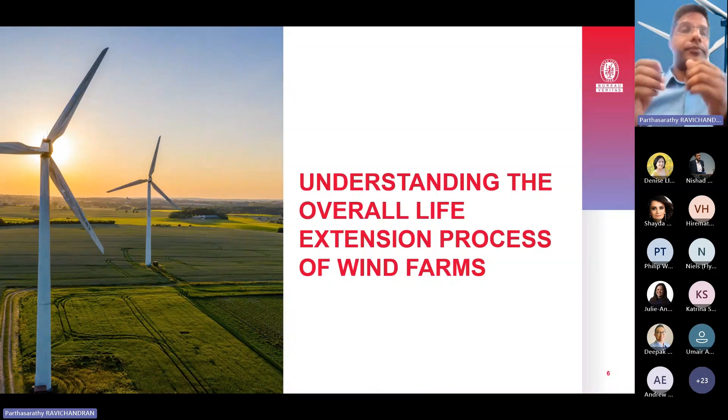What we have learned in the European sector as well as in the North American sector is that, from the reports compiled by Global Wind Energy Council and Wind Europe, they mentioned that the wind farms which have been commissioned in the early 2000s and up to 2010 started coming into a phase of repowering as well as lifetime extension, and some of them are also getting into a decommissioning phase. So the aggressiveness of this lifetime extension is not only happening here in Australia, but has been in particular looked at in Europe, where governments are supporting owners in realizing that their existing wind farms could be better off repowering rather than decommissioning.

So there is a both contexts will be discussed.

If you look at the complete scenario, there are about 40.9 gigawatts of onshore wind farms that has been installed. Typically all these 40 gigawatts of wind farms have got 2 megawatt and 1 megawatt typical nameplate rated capacity of wind turbines. At the most, Germany, followed by other European countries, are in the lead up to look at repowering or life extension situations.

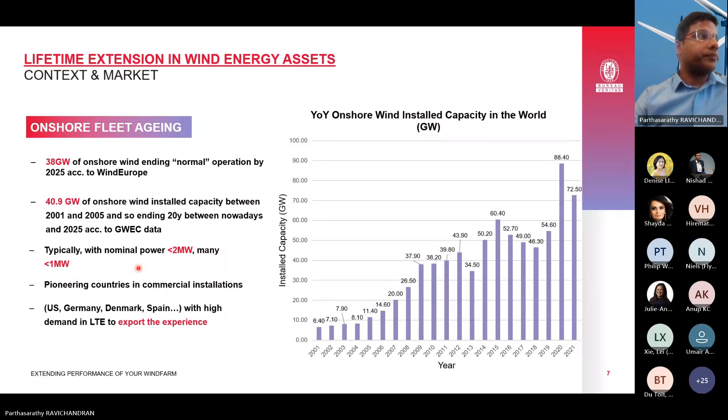Now, when you look at what's happening in the Australian context, we see that in the next 10 years' time, or even 8 years' time from now, we have different categories of wind farms coming for end of life, considering they are 20-year design life. So when the commission year was set between 2002 and 2010, we could see the list of wind farm owners whose wind farms will be coming for LTE scope.

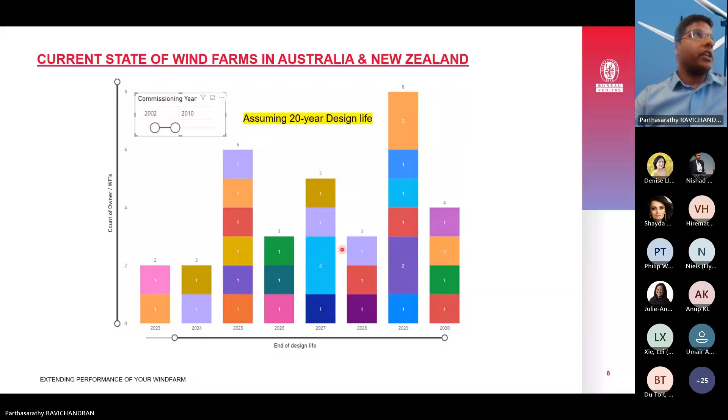Now, as I mentioned, the life extension point is whether we want to do a repowering, or whether we want to extend the life of the turbine, or whether we want to decommission. But we have to look at what is the context of going for a life extension process.

Some of the owners are realizing that they want to have decarbonization targets. There is also an issue with respect to waste recycling after decommissioning. How are we going to handle that? What are we going to do with the blades which go to a landfill? Is there a process to retrieve and reuse them in a circular economy?

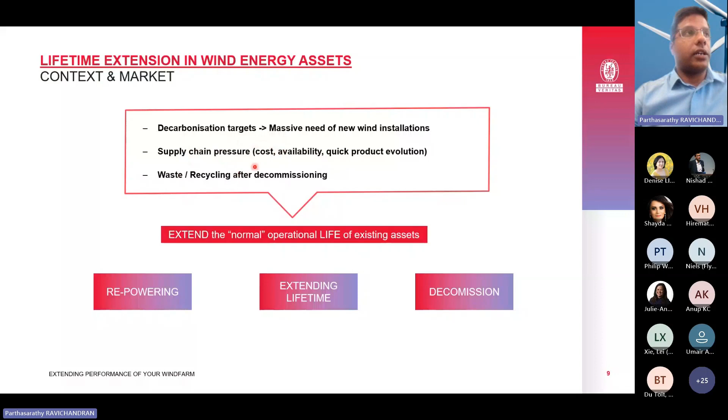And also the recent pressure on the supply chain due to cost, availability, and product evolution in a short span of time. It's much like you have a hybrid car and an electric car, and there's a rampant push for the use of electric cars, but the market is not well prepared in that context. So similar kind of issues also exist with turbine technologies growth.

Now, LTE doesn't have a proper IEC guideline, but it is in the draft stage that has been proposed, and it's possible it would be released this year.

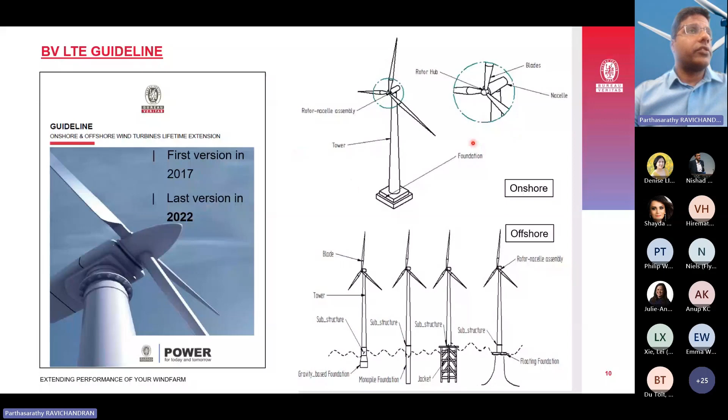Bureau Veritas has its own LTE guideline that has been vetted by leading technical centers. We released our first Bureau guideline in 2017, and the latest version was released in 2022. What we covered in this guideline is not only onshore turbines, but also offshore turbines.

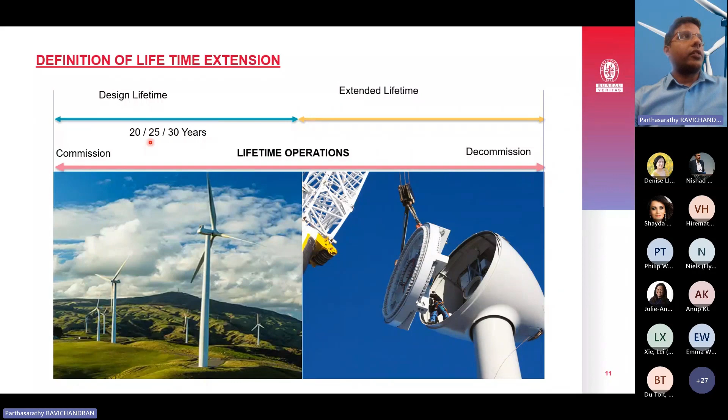Now, when you look at the concept of life extension, what it means is that there is a design lifetime when the turbine is actually produced before the commissioning stage, and it has an option for 20 to 25 years for typical onshore turbines, whereas for offshore it would be between 30 to 35 years in the design lifetime space when the turbines are designed.

In the context of what extension means, when it is reaching 20, 25, or 30 years, how much can you extend when it is reaching its end of design life, and how much can you still use the existing structure to keep producing power. The question then comes to whether you want to go for repowering, decommission, or extension of life with what you have so far from your wind turbine production.

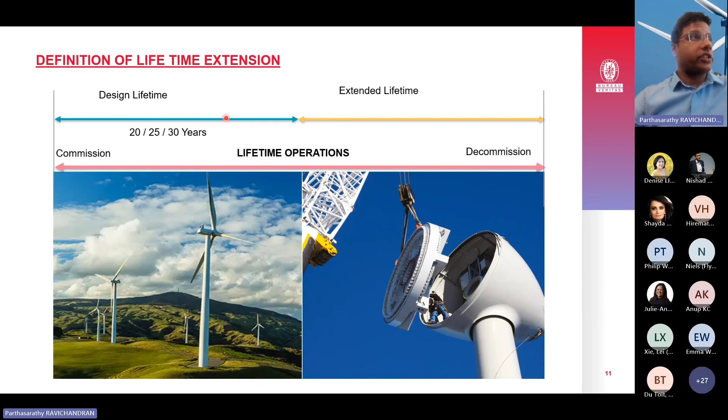In this first slide of the lifetime extension, I would be walking through the repowering of wind farms. Why do we need to consider repowering? How do these strategies help the owner decide at a very early stage when they want to repower it? What are all the considerations and strategies you need to look for?

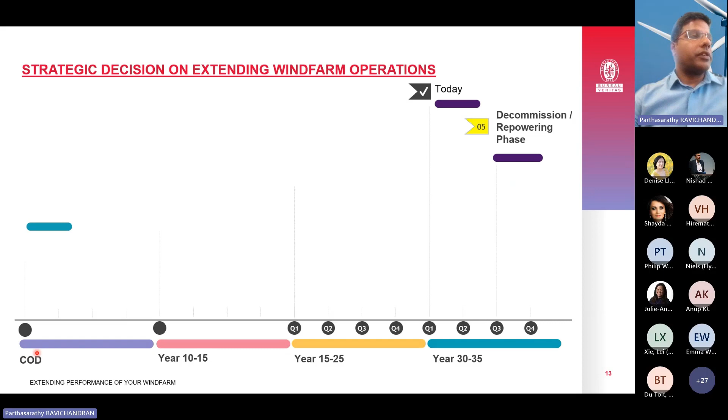So when you look at the complete life cycle of the wind farm or wind turbine, from commissioning date all the way up to year 30 or 35, we would see in terms of repowering whether the owners could make a decision on how much is the capacity at the time of commissioning, and how much more is also available for the future. For example, if you pick and choose a particular wind farm at a particular site, and in the future there is no augmentation of grid capacity, then there could be a high chance that you may not be able to extend the life, or you may have to go for a decommissioning process.

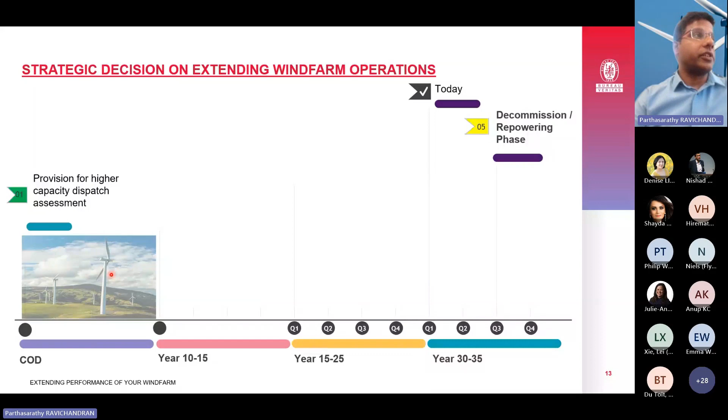On the other hand, if there are feasibilities that the site has got higher dispatch capacities, there is a chance that you could look for an LTE assessment, and then in year 10 or year 15, you could possibly evaluate whether you can go for a repowering scenario.

In the next couple of slides, I would talk in detail how repowering concepts are looked at and how it has been evaluated in Germany for a specific case, and there are some tests and trials that have been made for repowering cases.

The other aspect is once you've reached the later stage of the design life of the turbine, in year 15 to year 25, this is where the actual assessment of LTE starts. So you may have crossed your break-even period from repowering to using the existing turbine to extend its life and decommission it. But in some case-by-case scenarios, repowering could also be done at this stage, so you're ahead of time, say 10 years or 5 years, and use the existing wind farm facility for a repowering case.

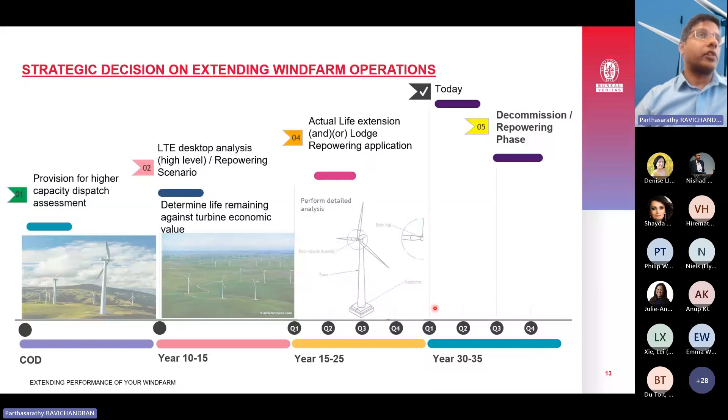The reason it's a golden site is because at that time you had a best in class for those sites, but the turbine technologies were not up to speed.

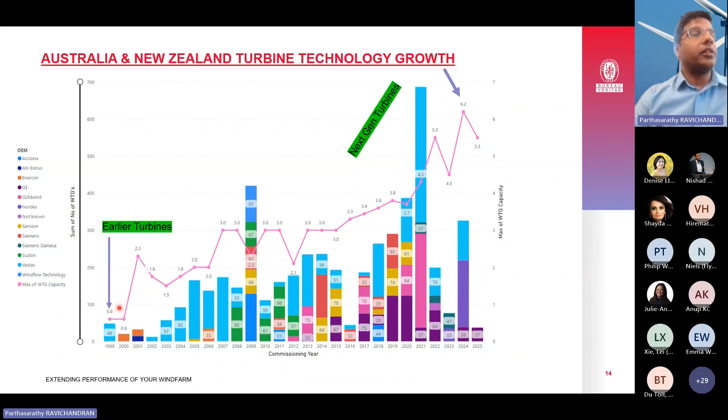But then there is again feasibility going on about which areas those turbines would be suited for. You may run out of space for those turbines, not able to fit them for these kind of wind sites.

On the other hand, if they would reevaluate the same site, they could go maybe from a 2 megawatt to repurpose the site for a 4 or 6 megawatt class turbines.

But these steps need to be taken a bit early on, where you could validate what is your cost layout in terms of how much you are expending your OPEX cost. Is your turbine consuming more cost to produce per location? And how is the access to your existing supply chains as against your new turbines, which would be much more efficient than your old turbines.

So we have looked at the Australian context. We have seen that there's been no repowering so far carried out in Australia. The reason is that regulatory support could be one of the reasons. The other reason is that the connection capacity in older sites is not permitting that dispatch, or the grid facility is not sufficient enough to push to the limits.

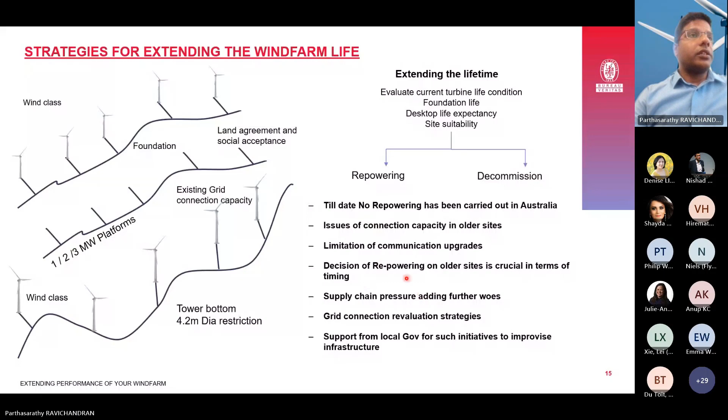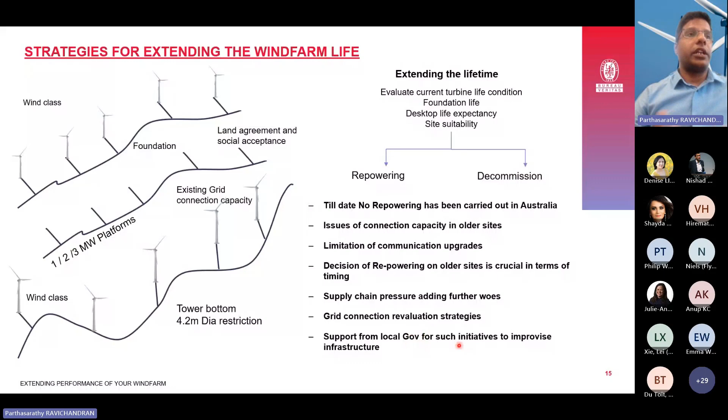Third point is looking at your communication systems - how your underground communication cables have been laid up, have they been up to date from 3G, 4G, and upgraded to 5G, those kind of issues. Then the other issues are your local government support, to accept whether the new turbines could be accepted in the same location. So there are two aspects to look at - one is financial perspective and also social acceptance.

Yeah, so Partha, sorry to interrupt - just very quickly, you mentioned one of the critical aspects here is around planning and timing. When do you think is the best time to start thinking about some of these strategies?

So repowering concepts could be even looked at as early as when you're signing up your contract with your OEMs, even before the wind farms are set up.

So early stage developers could think about how best to utilize the always-on wind power production capacity of a wind site location. For some, based on each owner's decision process, case by case, it would be advisable to gain information at an early stage, relook at it at year 5, and then possibly proceed to commence repowering if it all turns good in year 10 to 15. That way the timing would be much better. You could have a staged approach where you have ongoing capex and opex, and then a new influx of capex and opex as well. So these are the ways you can look at it.

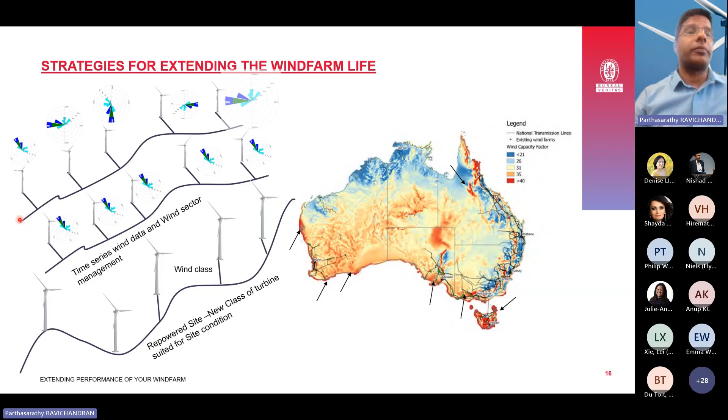It may seem very straightforward in terms of talk, but in terms of assessment there are more things to look at. What we need to look at is whether you need new turbines, shadow flicker assessment, aviation assessment, permitting process, transport and logistics, and how far the new turbines are able to cope getting from your existing shipyard all the way to the same location.

You're doing both things at the same time: one is decommissioning your existing turbine, and also, in a matter of time, you are preparing your land for the new turbines.

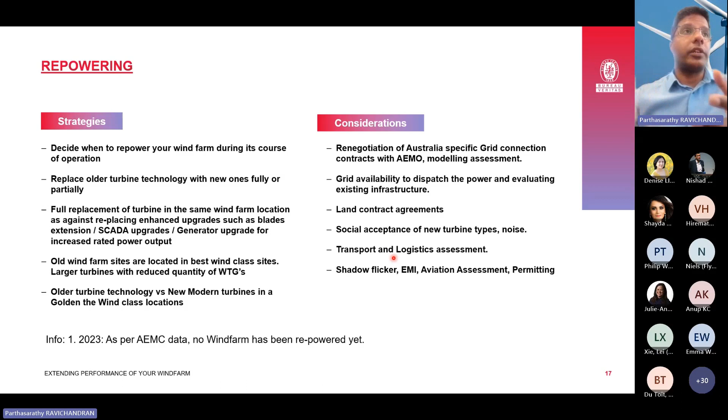Some companies or owners in Europe are also trying to see if they can reuse an existing foundation itself. For example, let's say you have a 4 megawatt class turbine and the foundation size is 6 to 10 meters in diameter. Can the same foundation be used or repurposed for a 4.5 or 5.5 class turbine?

Now I would like to jump into the context of life extension, what exactly the life extension process would look like. I'll walk through the process and what information criticality you need to gain from your OEMs. If your wind farm is 20 or 25 years old and you don't have a lot of information, it creates a lot more uncertainty, and more inspection activities have to be carried out on the turbines.

Then I would walk through how the turbine design life of 20 or 25 years is arrived at, and based on that, how you are extending the turbine life. That's the core key aspect of this webinar. And then how do you interpret P50, P90 results? How do you look at fatigue damage loads? What happens when there are cracks, visible surface cracks on major components such as the mainframe, bed frame, or even the hub cast? And then at the end of the process, you have condition assessment strategies and maintenance strategies prior to the decommission phase.

So basically, life extension is about looking at a component where it is doing the load transfer from the rotor loads onto the major components. So the major components like main shaft, gearbox, and generator are replaceable, but then there are non-replaceable components like your hub cast, mainframes, and the generator subframes, and also the tower. So we would be evaluating those cases.

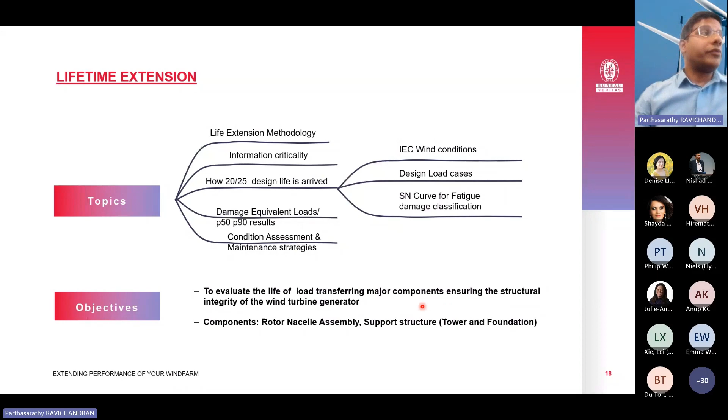Now, Bureau Veritas has its own guideline with a 3-stage process. Based on the level of information we have from owners, we categorize what context you're looking at, whether from a preliminary study point of view, whether you want to go for repowering, life extension, or decommissioning phase. Based on that initial information processing, we have an option at stage 2 to do the analytical process overall, followed by a condition assessment, and then give you a final evaluation, which is a confirmation certificate saying these turbines could be extended from their end of design life of 20 or 25 years to maybe 6 or 8 more years in operation.

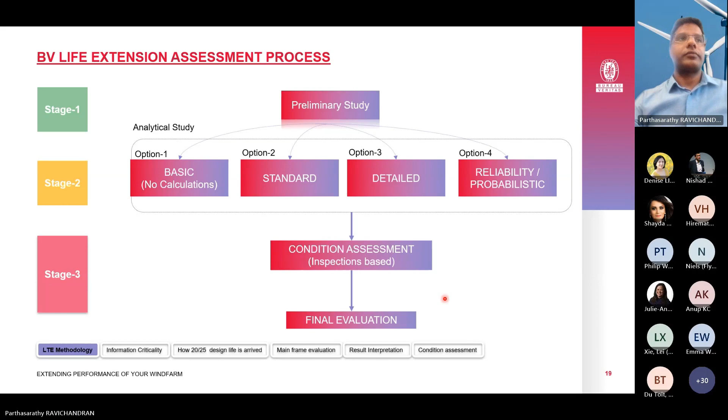As I mentioned in my previous slide, the differences of preliminary, analytical, and condition assessment, what exactly the scope would look like is what are the contexts, information we are capturing, what is the regulatory context, what are the current environmental conditions the turbines or wind farms are placed into. Then into the analytical phase, we would be trying to use the information to compare the site wind load conditions to the original design the turbine was intended for.

We use an aeroelastic model, which would have been created in the initial phase of the turbine design itself, but it's not easy to get that kind of information from your OEM. So it becomes a gap analysis to rebuild this same aeroelastic model and then come to a conclusion about what's the life left.

The other aspect is looking at the turbine criticality and also the fatigue life, which determines how much life is left structurally on your turbines to perform.

Then comes the case of condition assessment, where based on the analytical study, we would come to a conclusion on how many turbines have to actually be visually inspected or even have to go for advanced NDT methods of testing. And then it would also look at your foundation assessment, whether you need to do an NDT assessment without digging out your foundation to see exactly what's happening. We have new methods to evaluate the foundation.

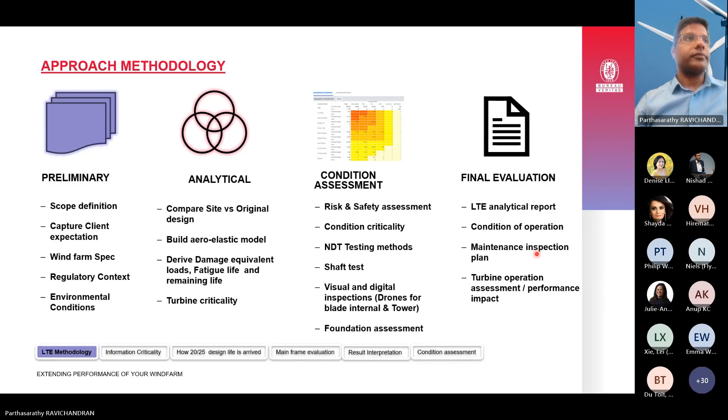Now, looking at the overall methodology or overview, as I mentioned, we gather documentations, and I would list in the next couple of slides what kind of documentations or criticality information we look at. Then what kind of data we prepare for the aeroelastic model, and then make a judgment of remaining useful life. This could also be not only fatigue load assessment, it will be also in the context of a reliability assessment.

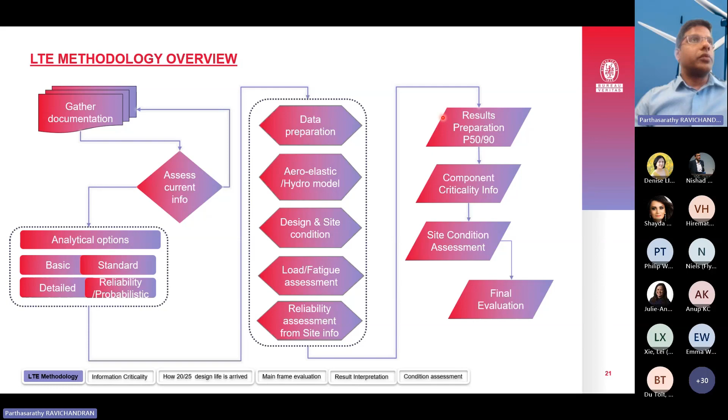Some owners may have this data saying, okay, I have an OEM's forecast of OPEX failure data. Could we be able to give a forecast of how much time this reliability assessment could be performed from your existing design life to the life of failure? From that, we would be able to prepare P50, P90 results, and then come to a conclusion of component criticality.

Now, as I mentioned in the previous slide, if the amount of information from the owners is less, then we may go with a basic approach. But then in the context of inspection, or the efforts for us to come to a conclusion about how many life years are expected, we may not be able to give you confirmed logical reasoning about whether it can sustain beyond 2 years, 3 years, or 6 years. Basic approach would limit us in those kinds of efforts.

But when we have more information from a reliability or probabilistic based approach, or even standard approach - there's a difference between standard and detailed approach. In the standard approach, we would have more information gathered from the owners, which would be sufficient enough to gain knowledge of what's the actual model the turbine has been built on, and how realistic our results are getting close to the original design.

In comparison, the detailed approach would have even more information, like control system strategies that have been performed on the turbine, and all the changes that have been done which are affecting the turbine loads. So the more the information, the less effort is required for us to predict the results.

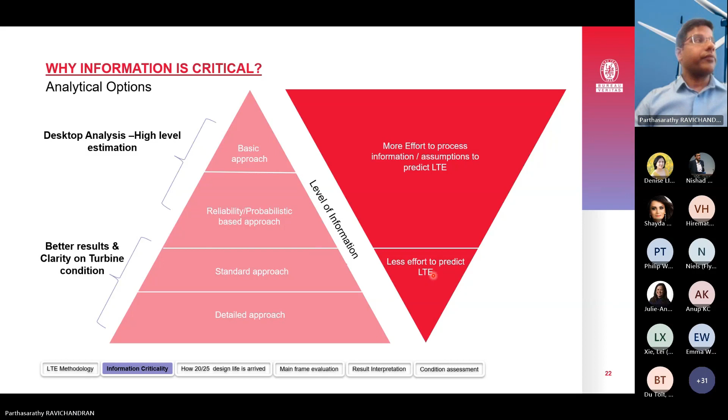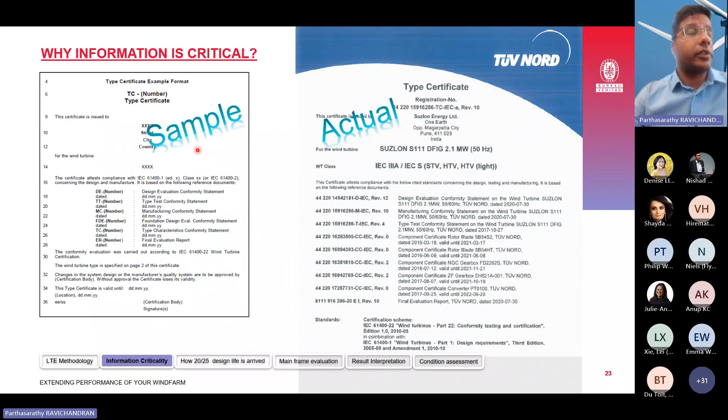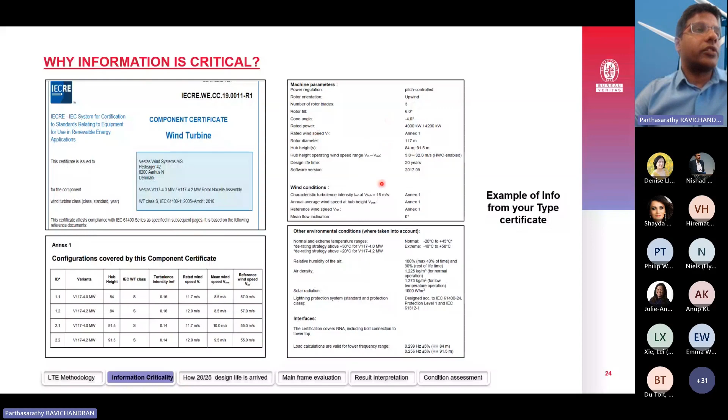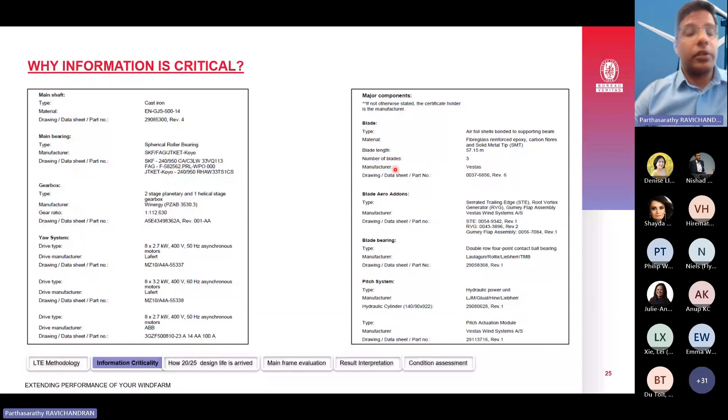Now looking at this point, there are more variants here, and what is the type of information in terms of the model that has been used is what this tells about. If you go one step further, we have more information in terms of where the supplier, which component has been supplied from where. Has it been manufactured in-house or from an external party who are type certified, component certified as per the requirement? This is like a certification body requirement.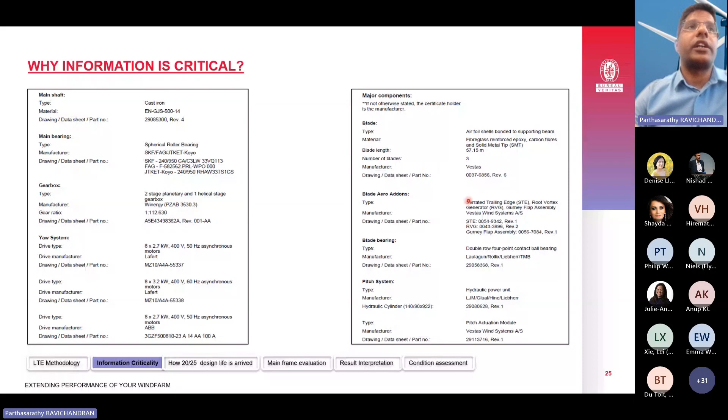So this information gives us a complete scenario. Has there been design defect issues or not? Then we would be able to tell, from your current design life, where it is going to.

Now, the other aspect of looking at site and design is the assumptions we make in the design simulation process, like air density or other parameters, which would be as per the guidelines of the 61400-1 IEC standard. But when we look at or evaluate the ground reality, it could be a bit different. So we need to bridge this gap and build the uncertainties in, and come to a conclusion on what's the actual structural behavior of the whole turbine.

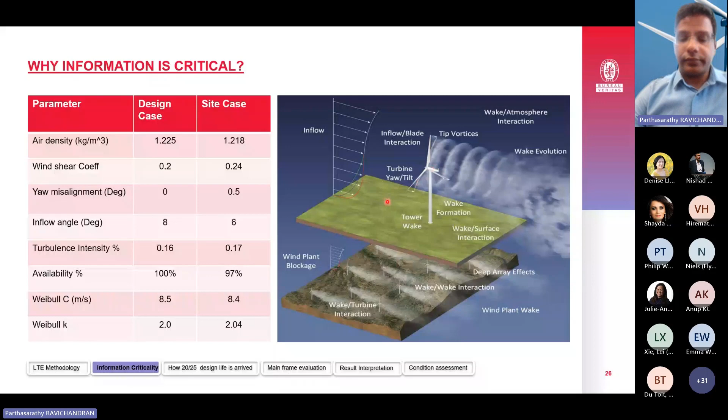Now, this is the core part. How do you validate your structure? I'm trying to give you context with this example.

The picture on the left is a person running a marathon once a month, and all his limbs are normal. But on the picture on the right, we have a person whose limbs have been replaced with prosthetics, and he's utilizing a structure trying to run the same marathon.

So what would be the difference? If we want to remodel this kind of situation, we have obstacles in between, like desert conditions, icy or elevated conditions, flat terrain conditions, or they could be doing a lot of high jumps on their way. These are the obstacles they could be seeing. So in terms of the loads which they would see on their knees, it will be different to what this person would see on his prosthetics.

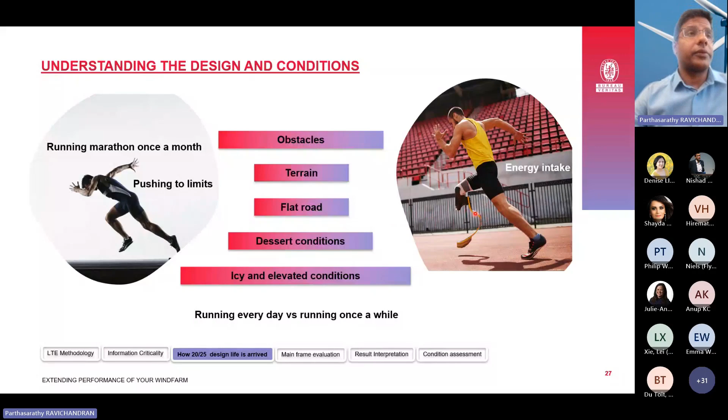Now, looking at another context of validating a structure: in the olden days, cars were not as safe as what we would see today. If you look at the example of Formula One, their purpose was to make sure that they are 10 years ahead in terms of validating how structures are safe enough for people in different scenarios.

The Formula One cars don't go into a passenger segment. The main reason Formula One is designing the cars is to make sure the materials they have used, let's say the monocoque design of the cockpit, is able to sustain a crash. In the event of a crash, the person is able to still survive and walk out of the cockpit.

They look at, okay, if the tire is going off, even if the suspension is breaking off, or even any of the ailerons are breaking off, it's still not of major concern in the whole turbine design life. Your major design life is to make sure the center structure is good enough for its intended design, be it 25 or 20 or 30 years, whether it's able to cope with different kinds of loading situations.

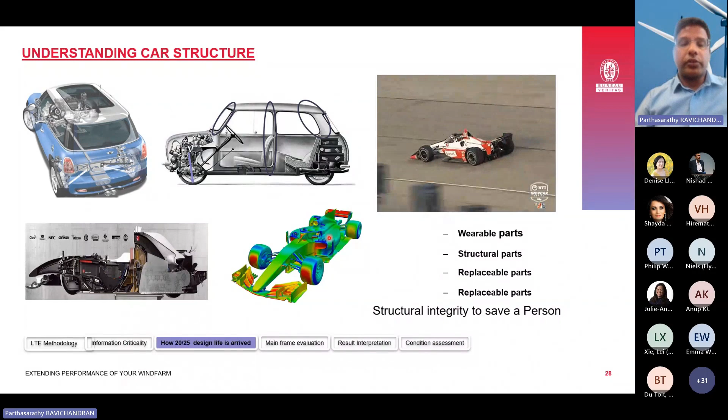For example, when braking or turning forces are in place, the typical G forces a person would see is 4 to 6 G. An aircraft or fighter pilot would see a 9G force. That means the same 9G force is also coming onto your structures. We won't see those kinds of loads on a turbine, but we would see a different kind of loading situation, which I'll show in the next couple of slides.

Now, I've been mentioning quite often about aeroelastic simulation software. Bureau Veritas has its own software called Opera Tool, which can do both onshore and offshore, covering all the structures for its assessment for design life, as well as producing for a type certificate point of view.

The other simulation software is Flex5, which doesn't have a user interface type; it's built on coding only. NREL also has its own version of it, but it's not as good as in a commercial space. Flex5 has been used for more than 30 years now. The other version, released late in the 2010 period or around 2005, was GH Bladed, which has a user interface in comparison to BV's Opera Tool.

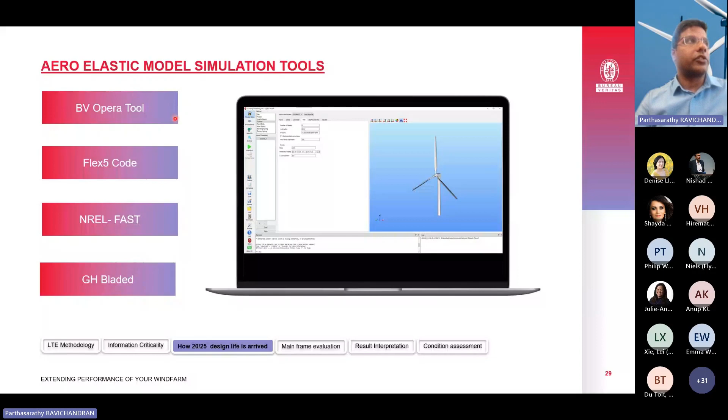Now, if you look at the whole context of this life extension, where are we fitting the aeroelastic simulation model? The process is that in the early design phase, when you select a turbine or a site, we would be giving a type certificate. This type certificate is supported by design evaluation, aeroelastic simulation code, manufacturing evaluation, and other processes. There's quite a bit more, but I've restricted to the key aspects here.

Once the type certificate is issued, you have manufacturing conformance, the turbines are manufactured, and it goes for site-specific conditions. From an operational or end-of-life design point of view, the same type certificate information would give us information about the aeroelastic model, what has been considered, and what information we would ask existing owners of a wind farm whose turbines are coming for a life extension. Say 6 years from now, if you have an LTE period coming up, we would ask these kinds of typical information.

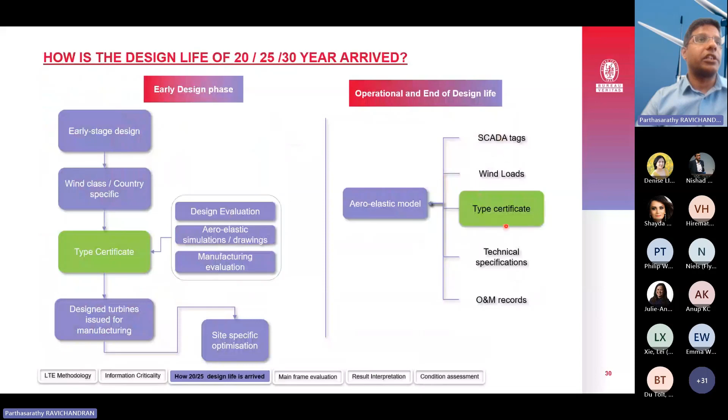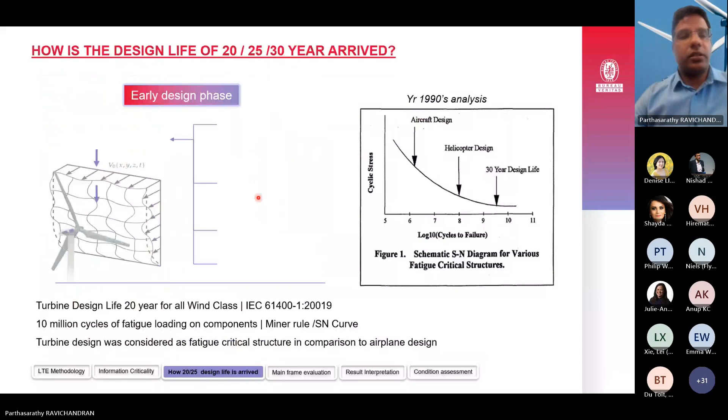Now, the first and foremost question when you look at early design is: how did you arrive at 20 years or 25 years in the first place?

Going back to this picture from 1990, it tells us that aircraft were more fatigue-critical structures back then. This means they had to simulate not the turbine, but components of the aircraft, in an experimental process to ensure the materials used in aircraft design, like the fuselage or wings, could cope with different loading conditions. So they used to do an experimental back-and-forth fatigue loading test.

They later realized that not only the aircraft, but also the blade, is a fatigue-critical structure. The blade material changed from balsa wood 30 or 40 years ago, to steel structures, to lightweight aluminum structures, and now to composite glass fiber. Those composite glass fiber materials had to be validated for a 30-year or 20-year period, which defined the usage of 10 million cycles of fatigue loading in the IEC guideline rules. This is the defining process that states how you arrive at a 20-year or 25-year design life.

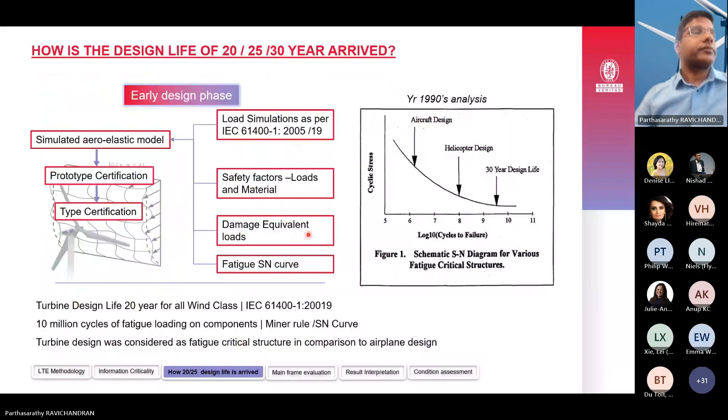Now, the other aspect, as I mentioned, was looking at the safety factors and the fatigue life itself. How do you look at fatigue life? In the previous slide, I mentioned a lot of simulation cases and how we use a type certificate.

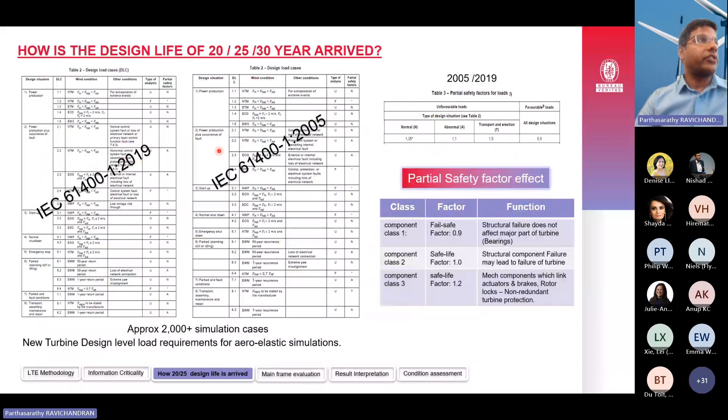One piece of type certificate information is the usage of simulation loads. Not all simulation loads are actually looked at from a lifetime design point of view. We would only validate where there are transient loads, changes in yaw misalignment, and other specific cases. This particular information, the simulations, had changed from what was done in 2005 to what is done in 2019.

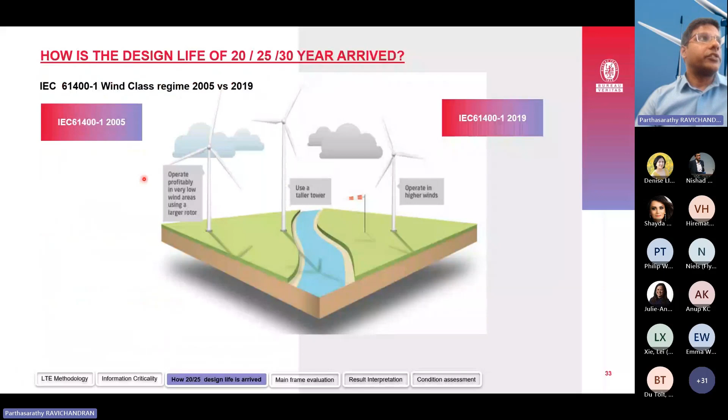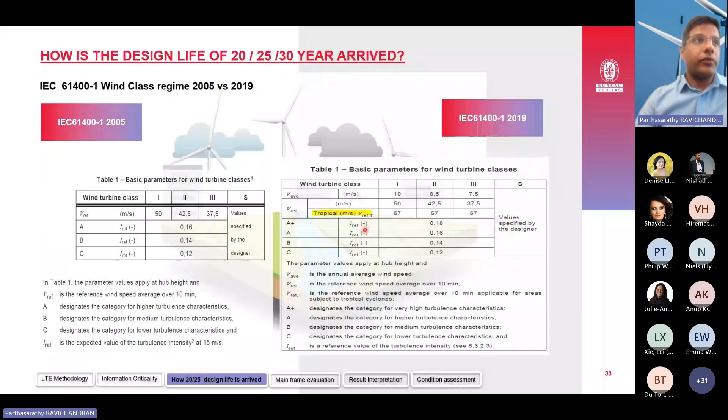The other aspect in considering life extension input information is your wind class and wind information, what was earlier used in the design context versus now. The picture on the right is the latest information from the 2019 guideline, where they have also included tropical wind zone locations. This means we have turbines that have to cope with more extreme loads than what you have in current wind locations.

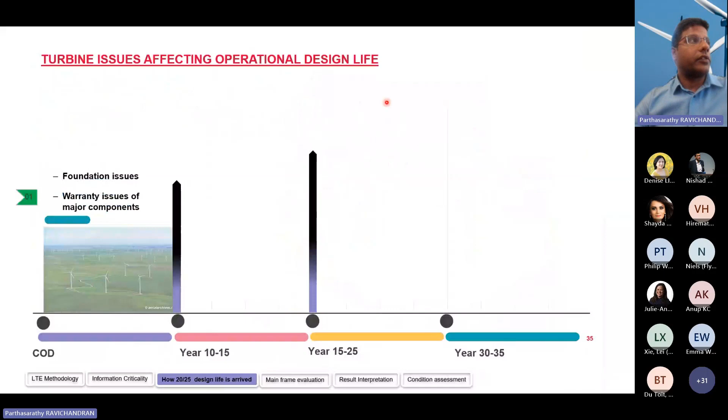The other turbines which are having issues during their operational design life are those with warranty issues or foundation issues. Another aspect is looking at upgrades and wind conditions, or whether any WSM optimization has been carried out, or whether it has not been looked at all for 10 or 15 years.

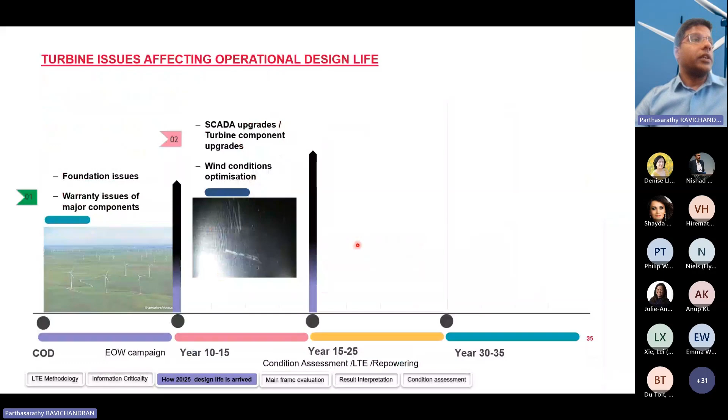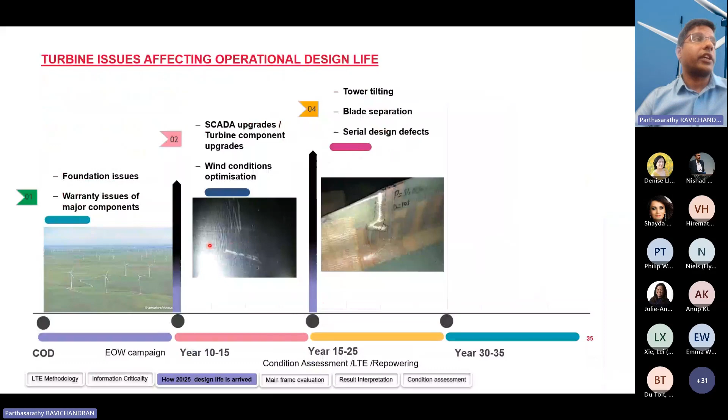If condition assessment or life-time extension repowering has to be done at this point in the turbine's life, there could be cases of tower tilting that some may not observe if the condition assessment has not been carried out properly. There are cases where blade separation could have happened, or serial design defects could have occurred inside the turbine that one may not have realized.

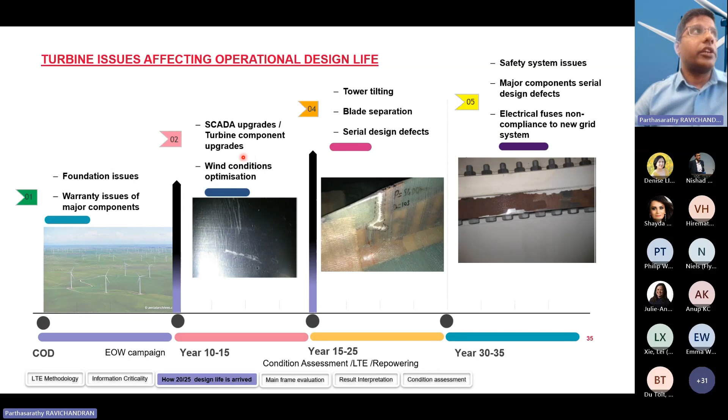Another aspect is looking at your usage of electrical balance of plant components and also some of the components inside the turbine. AEMO has classified turbines based on type 1 to type 4. Type 1 and type 2 are turbines less than 2 megawatts, and some of the old turbines are having issues with grid compliance, so they don't perform very well with respect to the latest grid issues. The new generation turbines are much more compliant and able to handle frequency fluctuations while transmitting power from the turbine all the way to the main grid. So those are the differences we see, or the issues that crop up throughout the turbine design life.

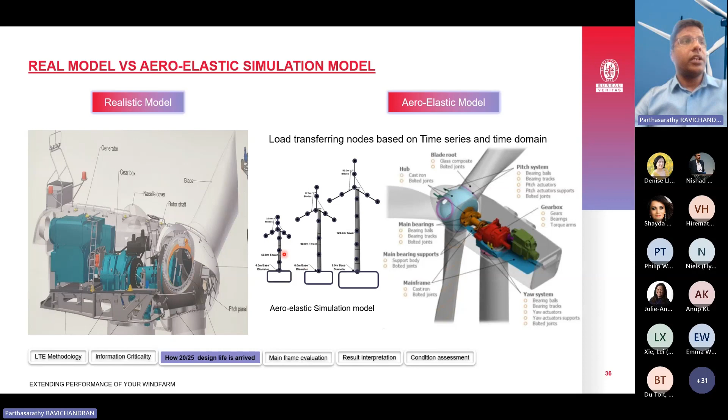Now, this slide shows at a high level what exactly we need in an aeroelastic model and what components we consider. The more components we have information on, the more realistic the model. Whether it's a 1 megawatt, 2 megawatt class turbine, or a 9 megawatt class turbine, the aeroelastic model is created for every type.

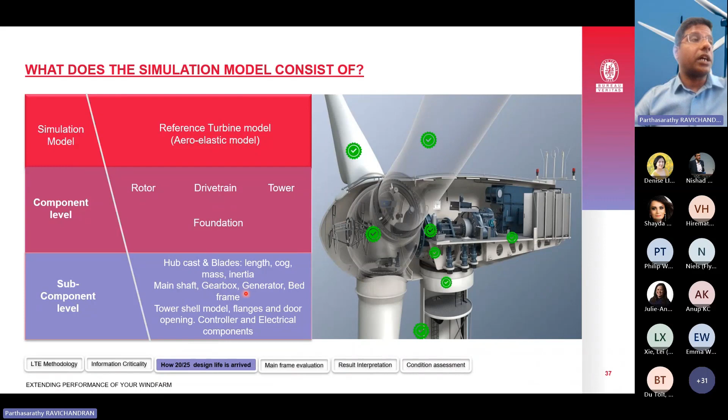When we look at what information we need at a component level, we would go for all these major components. When we take a more detailed approach, we would even get the mass and inertia details of a gearbox, not down to the component level, but what exactly is its mass and how well the structure is built.

Jules, I just wanted to know how much time is left. Am I keeping in time? You're running a little bit behind, so it's 1:43 at the moment. Right, maybe I have 6 more minutes to cover and then talk about questions for a couple of minutes. Yeah, 10 minutes of questions at the end. Yeah, sure.

As I mentioned, what we gather from an aeroelastic simulation model from a design perspective is to build a model which never existed. So we gather information such as design load cases. We look from a structural and fatigue loading point of view, what materials are used for major components, what the system's behavior and redundancy is, and also the external class of conditions from the turbine's behavior point of view.

When it comes to life extension, we would derive the same aeroelastic model, but look at the data from a different perspective. Instead of asking for design load cases, we'd be looking at wind site load cases, and also the specification that has been used, the SCADA system data for the last 1 to 2 years, and what measurements have been performed over its lifetime.

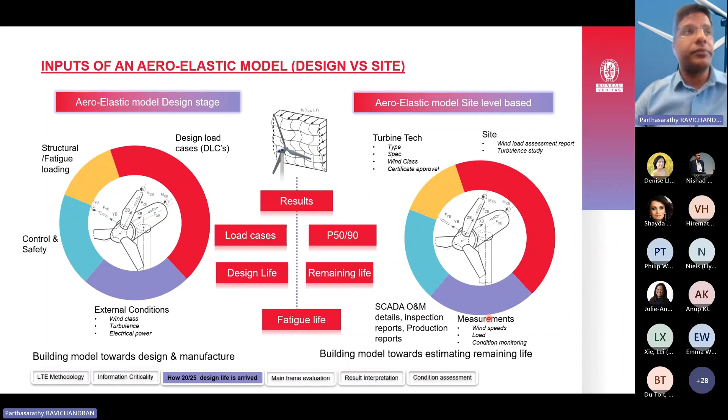The major inputs for getting the remaining useful life, on the right-hand side, are the key aspects which would be asked. One aspect is looking at your site turbulence intensity, comparing current site conditions to the designed purpose site. Also looking at SCADA aspects: how many turbines have been derated, what was the purpose, how many times or cycles per year this derating occurred.

And has it had any damaging effect on the structure itself? These are the kinds of information we correlate to ascertain the structure's current condition, and then generate information on how much life it can still go on, and when to decommission it.

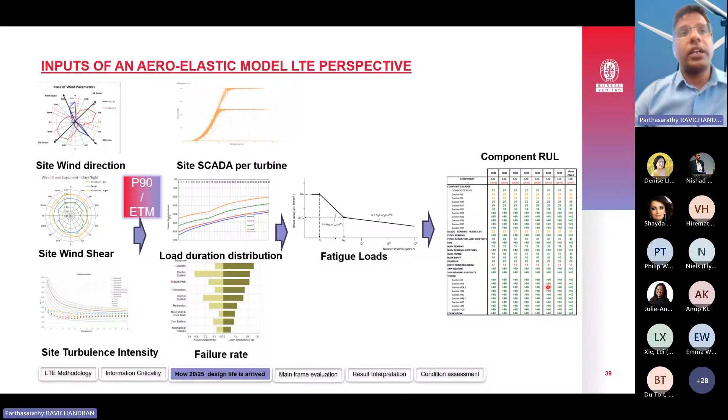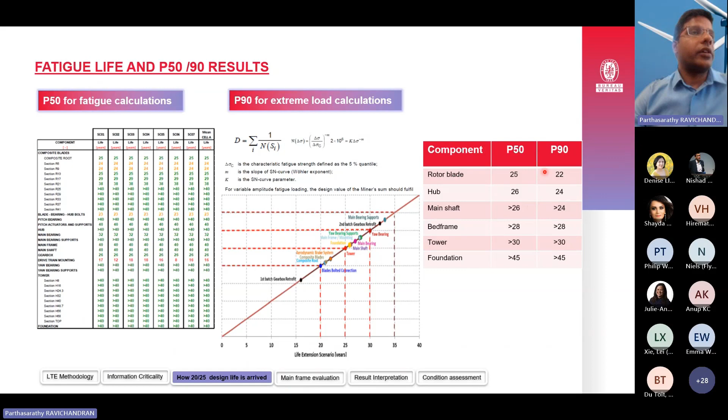Another aspect is what the existing extended design life would look like, what P50 in terms of fatigue calculation would look like, and P90 load simulation in terms of extreme load calculation would be considered. Combining these aspects, we can determine the component-by-component situation. Now I'm going to close with this.

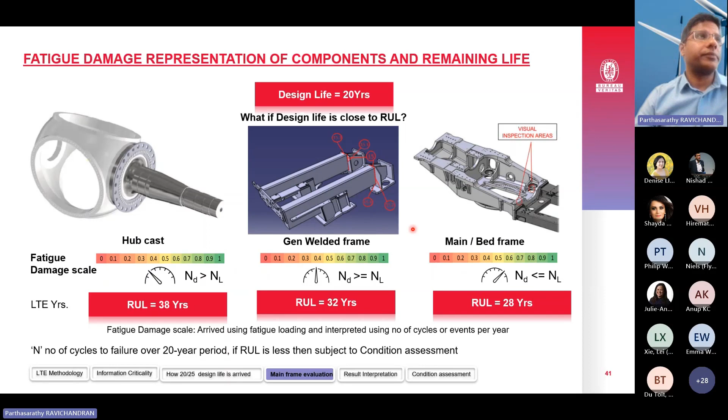The other aspect is some recent trends using multi-directional load, but most lifetime assessments are done only on uniaxial loads. This has also been under evaluation and considered under the new IEC guideline.

The picture on the right shows an SN curve for a particular component with a slope code of 3. So every component, be it blade, mainframe, or steel structure, has these aspects. What is the design life and what is the remaining useful life is what we would interpret from this SN curve.

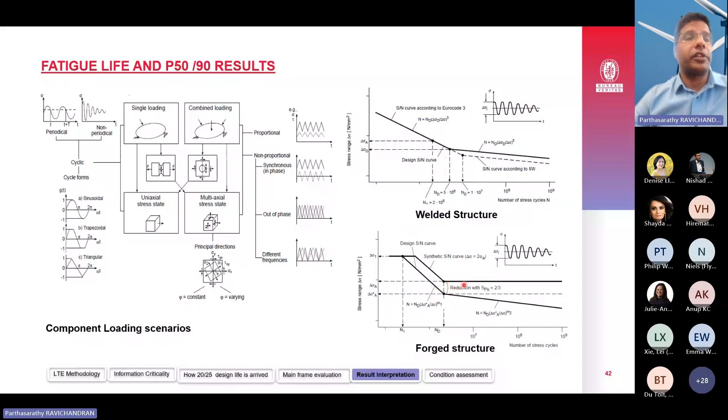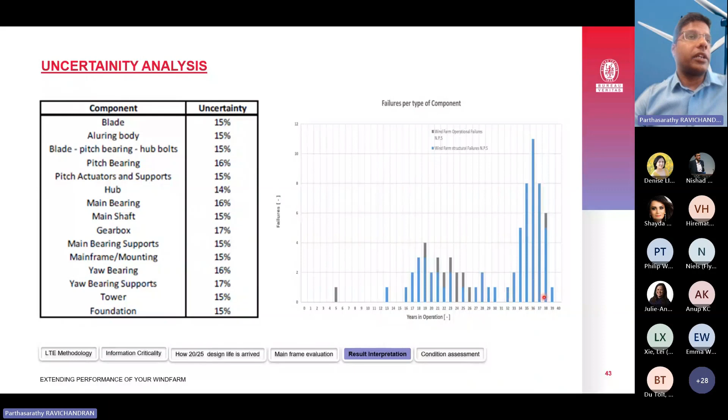There are uncertainties as well - how much detail of information we have assumed, and what load cases have not been considered. Based on that, these uncertainties would be looked at. So when you look at the picture on the right, you would see how much the failure percentage can go up as the turbine ages beyond 20 or 25 years.

Now the last aspect of this webinar is looking at component criticality. As we have assessed the analytical information, if you have a 100+ turbine or a 500+ turbine fleet, you would not be able to do 100% visual inspection. So the assessment would rely 90% on analytical results to ascertain how much inspection, component visual inspection you need to carry out.

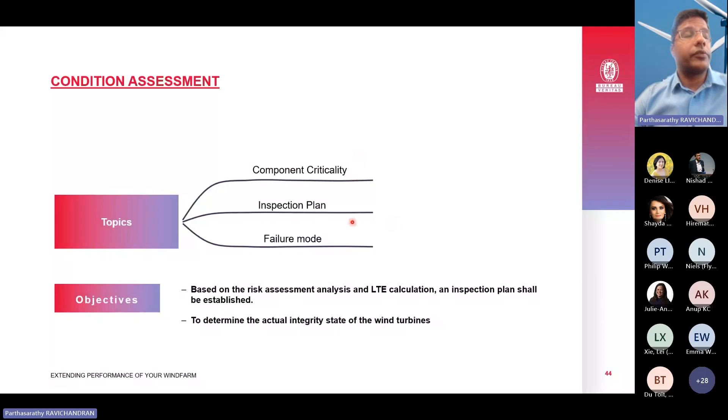We would have something like a criticality index for every component, and then rank based on that what's important, what's best, and what's worst. And we would come out with an inspection type for each and every type of component.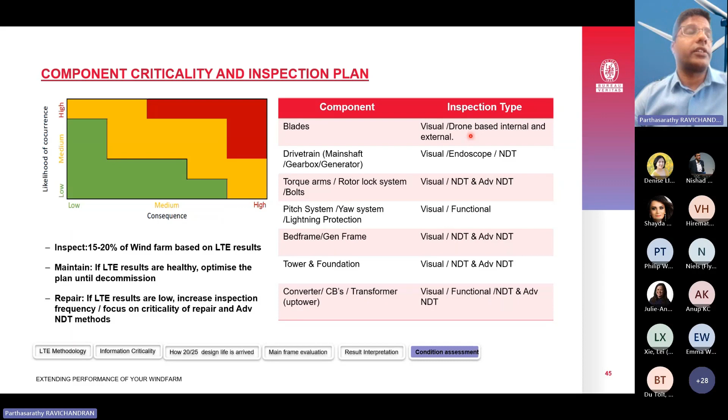In some places we have also started using blade internal drone inspections for blades as well as towers, which fast tracks the way in which we look at visual inspections.

The other aspect is this good information to look at, right from your foundation all the way up. What exactly is covered in a condition assessment is your foundation, your tower, your welds, how good your blade health conditions are in terms of cracks. Let's say at year 20, we are ascertaining this.

We could look at your maintenance and inspection records. And then if there are cracks on your foundation already, what mitigation do you have to do? How much will it be able to sustain?

We have cases where a gearbox failure, even if one or two gear teeth have failed, is not so important as compared to a crack on the mainframe. So a mainframe crack is more severe than what a gearbox failure could look like. In this case, you would be able to replace a gearbox, but not the frame of the turbine which is holding the gearbox, so that becomes a more critical aspect.

We would ask you to increase the frequency of that inspection - how much load is passing through the turbine, is the crack growth increasing substantially year by year. So those are the aspects we look at.

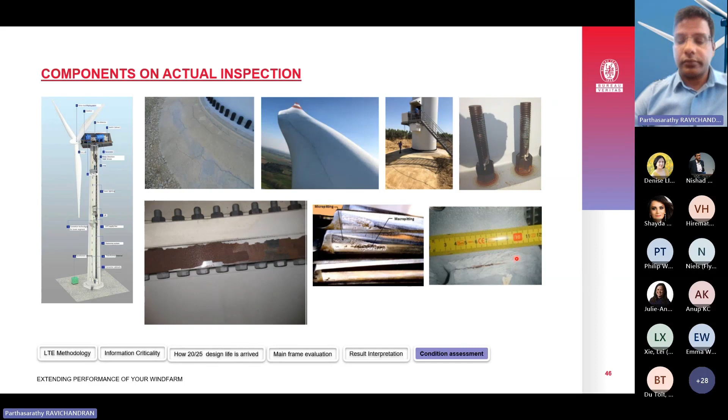Now when we look at the final part of my slide, it's what are the failure modes. For each and every component, we don't want to see a blade rip off while it is in year 20 or 25. The owner would try to protect that their turbines are well received and well accepted in the public space. Safety commissioners keep a watch on what's happening to your wind farm, be it here in Australia.

There have been cases where, at the start of commissioning of the turbine itself, the blade had cracks. Or this is a case where, in the worst case scenario, the blade root bolts have ripped off and it had strewn across the field. So these are the kind of situations that are a worry for owners, if they are in an owner-operator situation.

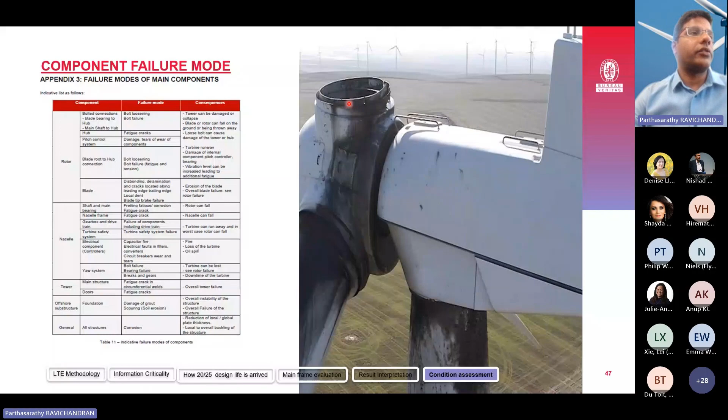Coming to the conclusion part, what we would ask wind farm owners is to talk with your OEMs and ascertain, every 5 years, what is your current situation of your turbine life, how critical is your supply chain, evaluate the cost point of view, and look at the minimum set of information you need to gather.

As I showed in my presentation earlier, at least having a type certificate matters, but a lot of owners aren't aware what exactly a type certificate is or what its relevance is. Most people are not aware of the certification process.

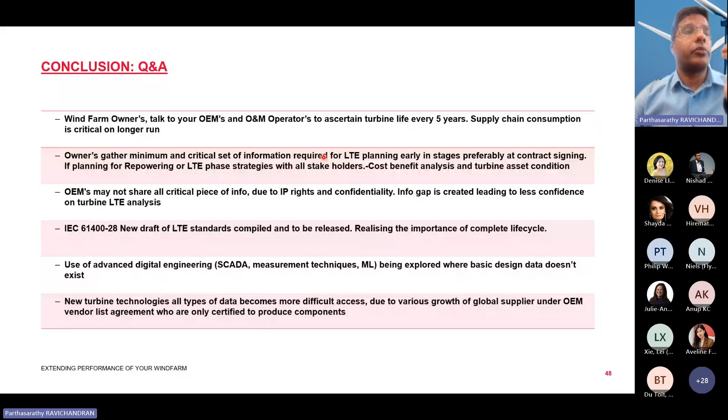Also, in some places there is a gap where the OEM doesn't share critical pieces of information from design or drawings due to confidentiality.

Recently, all this information has been compiled in the IEC guideline to help owners understand what information they would be requiring and how to interpret it. If not, you would see guidelines from every certification body coming up asking for different kinds of information.

The other aspect, for some of the largest wind farm owners where they don't have any kind of information, is that they rely on digital engineering or digital twin to ascertain whether they can do this lifetime extension using digital twin modeling, and to figure out what life is left when there's no information at all.

The final aspect is that new turbine technologies have more information that is being protected and not shown, because of competition between OEMs trying to get the best out of their turbines. So the information gets more obscured, which causes more issues later when it comes to a lifetime extension scenario. That's the overall context of this LTE.

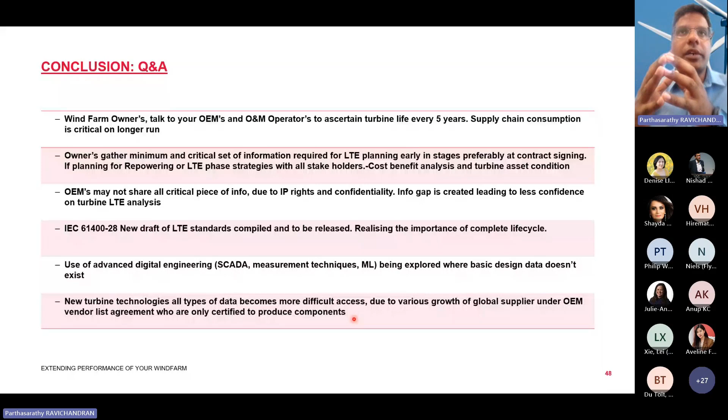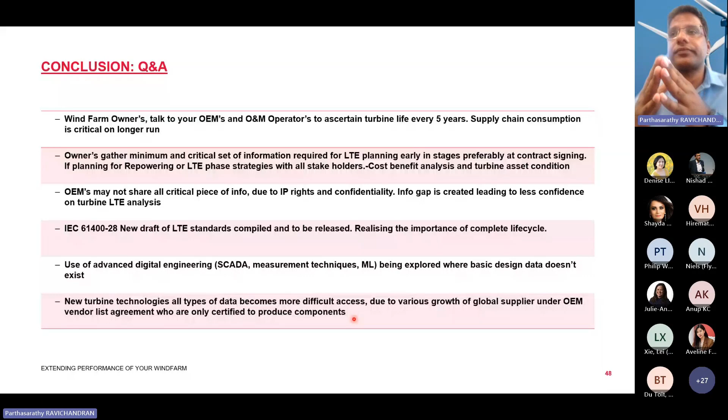I believe you would have been able to grasp the core of the information, what we exactly look for in terms of the turbine's aspect, which is to make sure that the turbine is structurally integral until decommissioning happens and is able to fruitfully deliver power production. That's the end of the slide.

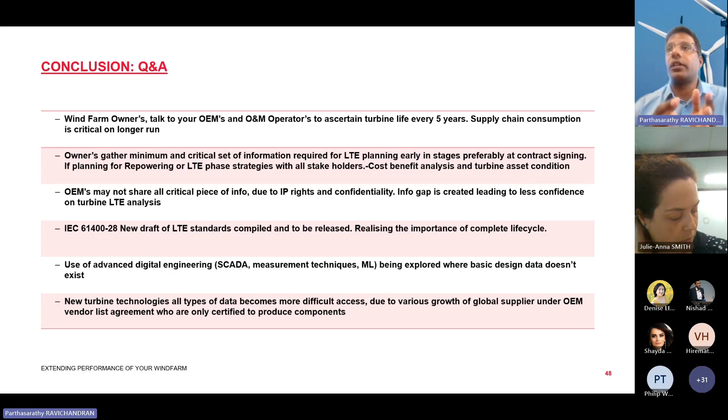If the component surpasses the theoretically expected design life but remains structurally intact, what steps should be taken to assess the remaining life? So if we interpret, based on assumptions, that it has crossed the design life, we would ask to perform more NDT visual inspections, and we could even do strain gauge testing to check whether the fatigue loading has really crossed the threshold or not. Those are the aspects we would look at to validate whether it has theoretically crossed or not.

Could you please talk more about foundation assessment, obviously not limited to the foundation that can be visually inspected? Yes, so the foundation assessment...

Recently, what I've learned is that the growth of technology includes ground penetration radars being used, where you don't have to excavate any part of the foundation. Some places are using this to assess the foundation, to see whether the same foundation can cope with a new generation of turbine.

Let's say I'm having a 3 megawatt, or an older class site has got a 3 megawatt class turbine—can it be repurposed for a 3.5 or a 4? Can the same foundation withstand it? What all changes do I need to reassess? So that kind of information, your existing OEM itself can give an answer to, and it can also be independently validated by a certification body like us, to give you confirmation or assurance to your investor on whether going from a 3 to 3.5, or completely replacing with a new class of turbine on the same foundation, is a viable solution or not.